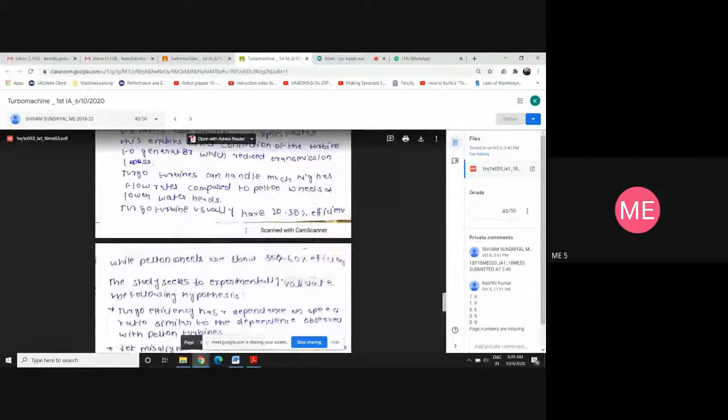Proper instructions are given from myself, HOD, as well as from the institution mail. In spite of that, if people are not following that, we have to take some rules, some action. So we are taking that. Okay, is it clear now?

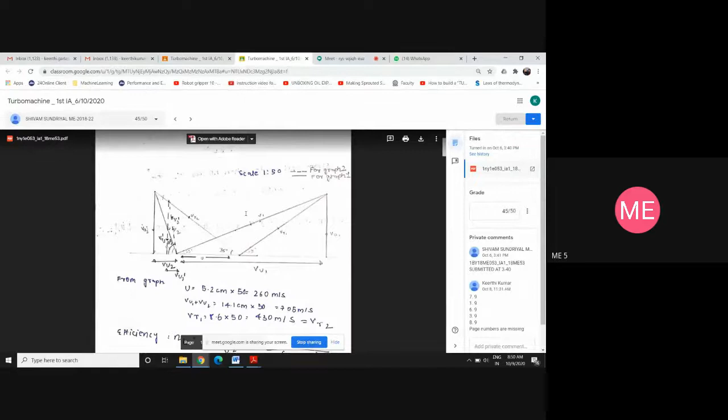Shivam? Yes, sir. Yes, sir. Okay. For others also, I am telling, I have written the comment here.

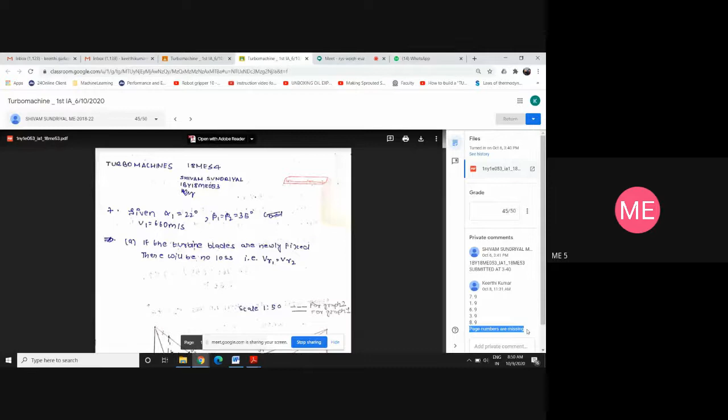Why have you got less marks? Either the page number is missing, signature missing, or question number missing. So in the next internals, I want you to be very careful regarding that. Should not miss those things. In exam, if I am the evaluator, generally if question numbers are not there, we will not have the patience to give full marks. So you should not lose marks just because of the question number, okay? I hope you understood what mistake you've done.

Okay, all of you go back to the earlier class, that is multi-stage turbine. Can anyone tell what is the other name for the multi-stage turbine? Curtis turbine. Multi-stage turbine, other name for the multi-stage turbine is a Curtis turbine, correct?

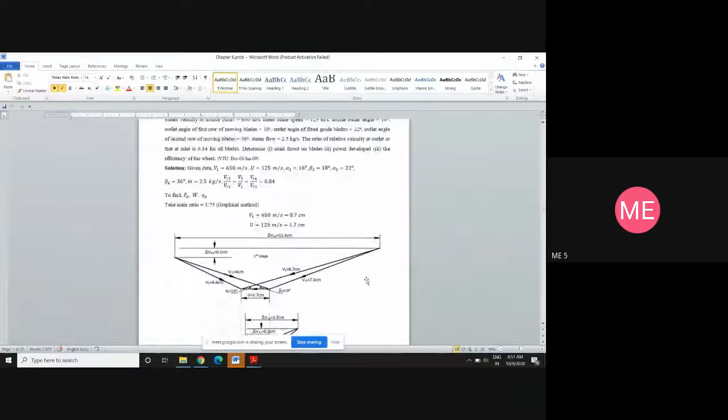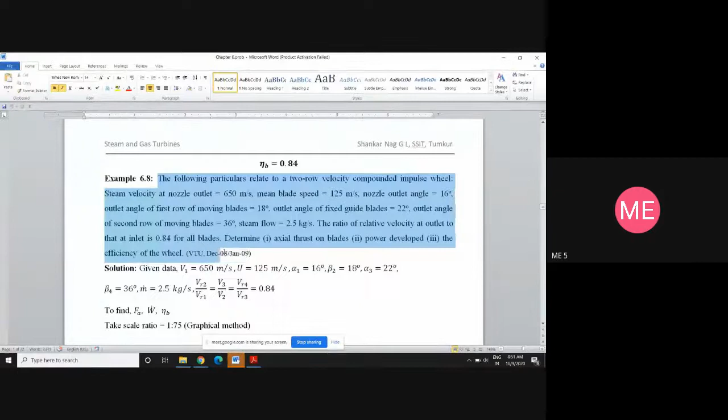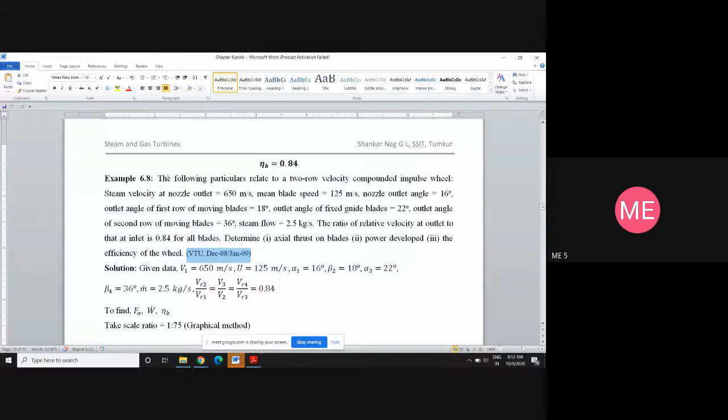Can you all see this screen? All of you copy this question. Please copy this question. This question was asked in Jan 8, then December 8, and Jan 9. Many times I prepared this soft copy, but it was asked that time. Okay, take this. The following particulars...

Relate to a two-row velocity compounded impulse turbine. What do you mean by this? It is a two-row velocity compounded impulse turbine. It is nothing but a multi-stage turbine.

The steam leaves the nozzle outlet. The steam velocity at nozzle outlet is 650 meters per second. Can you name what this is? The steam velocity at outlet of the nozzle is 650. That means V1, absolute velocity at the inlet. Even though here it is given as outlet, the outlet is with respect to the nozzle, but the 650 is with respect to the inlet if I consider for the rotor.

Then the mean blade speed is 125 meters per second. That is U, mean blade speed is U. Nozzle outlet velocity is V1. And nozzle outlet angle is 16 degrees.

That means alpha 1. Just to confuse you, he has given outlet. So many students, what will you do? Nozzle outlet means you will simply take alpha as outlet, meaning 2. No. Nozzle outlet will be the inlet for the turbine. That will be 16 degrees, alpha 1.

Then outlet angle of the first row of the moving blade is 18 degrees. Outlet angle of the fixed guide blade is 22 degrees. Outlet angle of second row moving blade is 36. Then steam flow rate is 2.5 kg per second.

All of you copy this question. I'll explain how to write down the data. Next, the ratio of relative velocity at outlet to that at inlet is 0.84 for all the blades. Determine the axial thrust on the blade, power developed, and efficiency of the wheel. All of you copy this question.

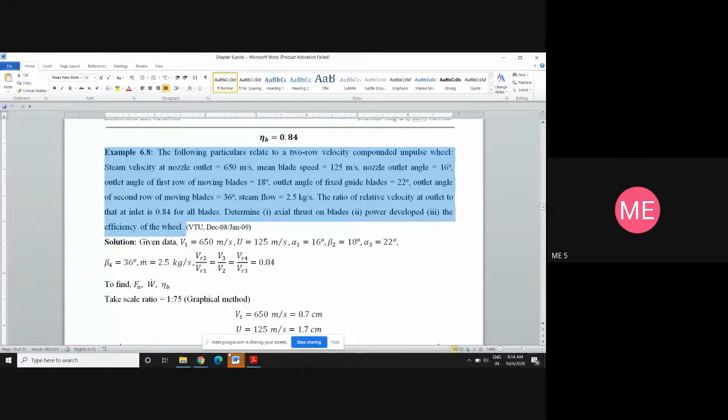I hope everyone has copied that question.

Yeah. Can you see the screen? Hello? Yes. Okay, okay. So I'll just open the question for my own reference.

I'll explain how to write down the data. What he has given: the following particulars relate to the two-row velocity compound. That means you understood that it is a multi-stage turbine. I'll write it either as Curtis turbine or multi-stage turbine. So this is the multi-stage turbine.

What data has he given? The steam velocity at nozzle outlet is 650 meters per second. That is V1 is 650 meters per second. There is no doubt in the single stage as well as this.

There is no change in single stage or the multi-stage. V1 is always the velocity of the steam which is inlet to the turbine, or the other name is V1 is the velocity of the steam which is coming out or exit from the nozzle. That is 650 meters per second.

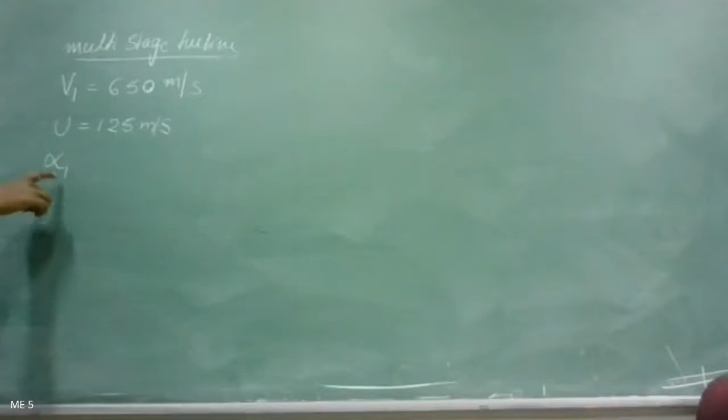Even though he has given outlet, we will write it as 1, because for the nozzle it is outlet, but coming for the rotor, this alpha 1 is inlet. So alpha 1 is 16 degrees.

Then the outlet angle of the first row of moving blade. That means beta is the moving blade angle. Outlet is 2. It will be equal to how much? 18 degrees. It is 18 degrees.

Then the outlet angle of the fixed guide blade. Guide blade angle is alpha. What is the outlet angle of that alpha? It will be alpha 3, and that is equal to 22 degrees.

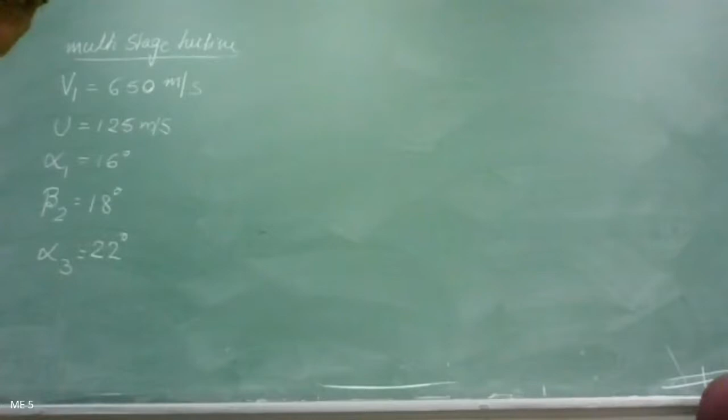Then the outlet angle of the second row moving blade, again moving blade is beta. If you go for the second row, it will be called beta 4. Beta 4 is equal to 36 degree. Then the mass flow rate is 2.5 kg per second, m dot.

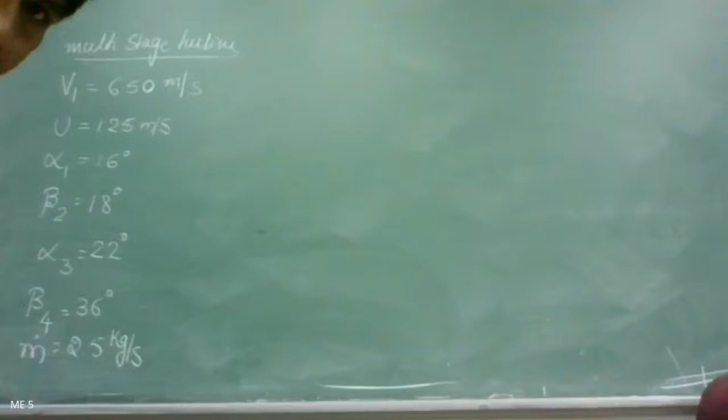2.5 kg per second. What he is asking is to find the ratio of relative velocity at outlet to inlet, which is 0.84. That means CB is equal to 0.84.

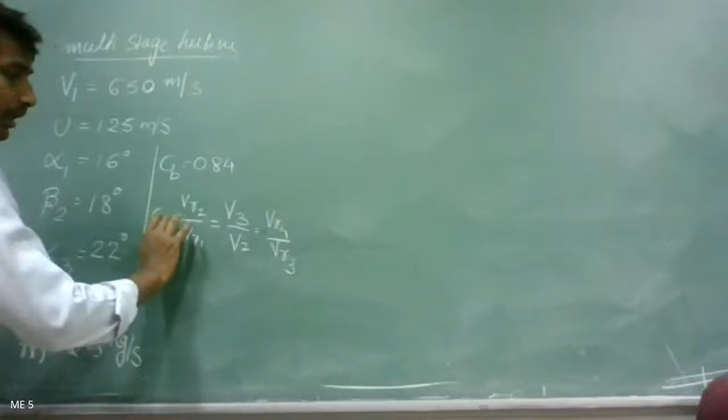How many blades will you get? We'll get 3 blades: first moving blade, second fixed blade, again second moving blade. So the CB value is same for all. That means VR2 by VR1 is equal to CB, and again the same value, 0.84, equals V3 by V2, which equals VR4 by VR3. He is telling this is the CB ratio for first moving blade, fixed blade, and second moving blade, and it is same. So I have taken it equal, and it is equal to 0.84.

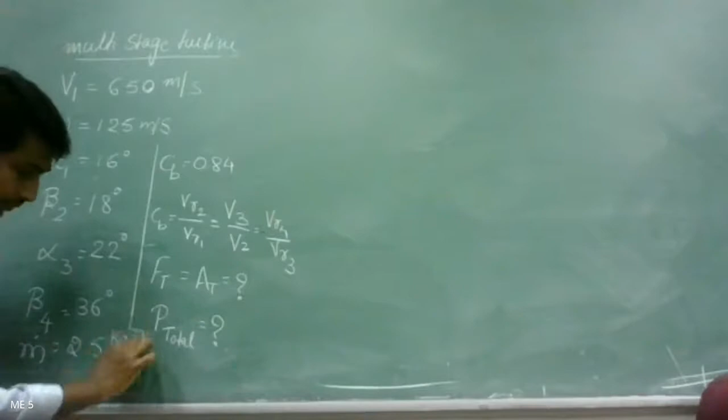He is asking you to find out axial thrust on the blades, so either you write FT or AT. Axial thrust is how much. Next, power developed, P total, because there is a multi-stage. So P total, then the efficiency of the wheel or blade, either you can call it blade or wheel.

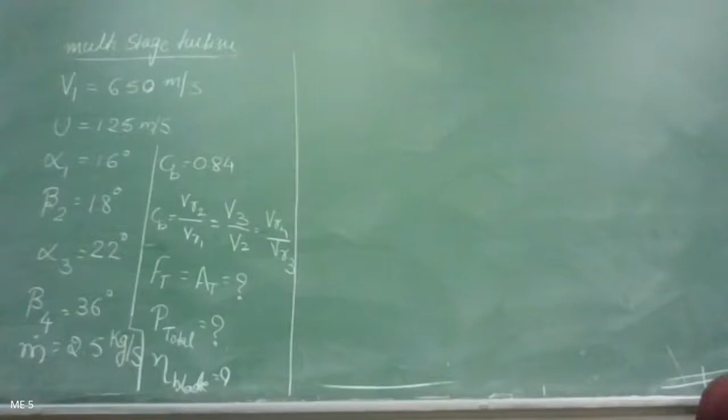So this is the data given. I've written the data. One minute, okay, write down the data. Any doubts in writing the data?

I hope you have completed. Then write down the scale ratio. So first stage you can proceed, same whatever method you followed in the De Laval one, same procedure, draw the velocity triangle for the first stage. To go for the first stage or the graphical method to draw the velocity triangle, we'll go for scale ratio. So how to take the scale ratio? What is the thumb rule to take the scale ratio?

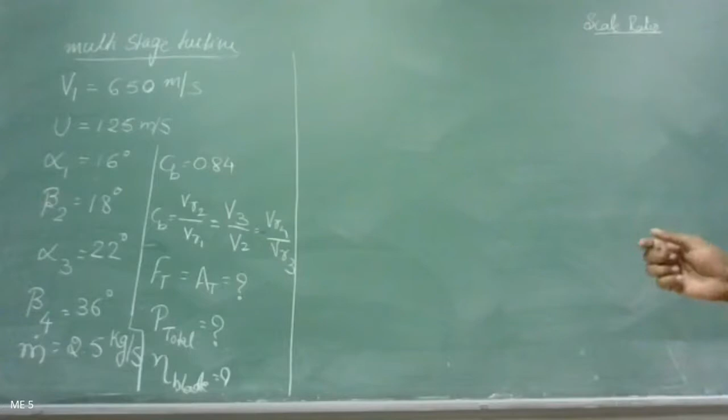V1, U should be equal to 4 centimeter. If you want U to be 4 centimeter or 3 centimeter, what's supposed to be the value of scale ratio? 1 centimeter is equal to, can you tell? So around 30, it's coming 31.25. So you have to take a better scale ratio. 31.25 doesn't look good.

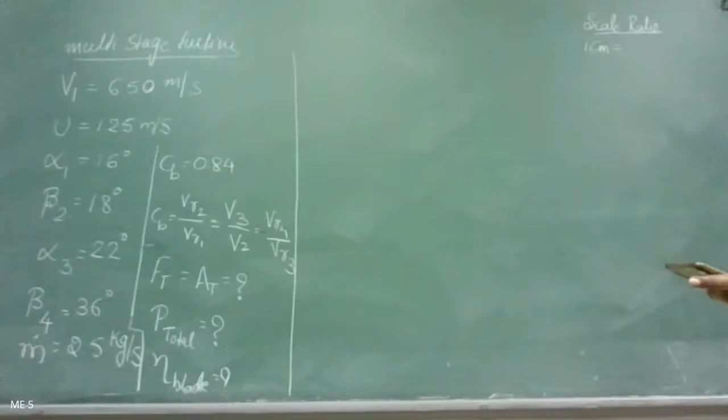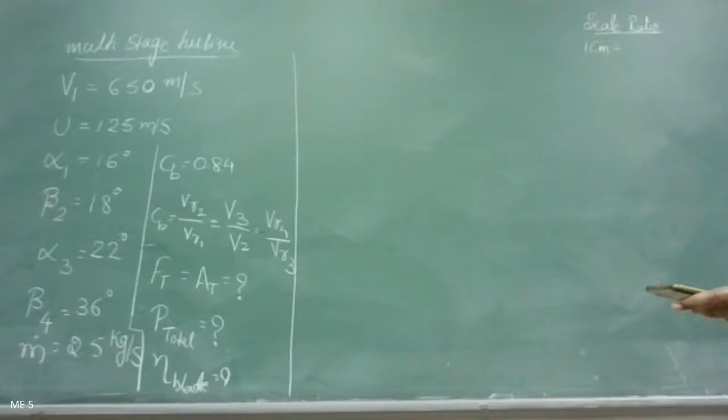Other values, other scale ratio, you can take any scale ratio, no issue. So okay, what about 31 point something you told now? That only I take, 31.25? Okay, I take that only, no issue. 31.25 meters per second, you can take any scale ratio, no problem. But make sure that U should be either 3 centimeter or 4 centimeter, don't exceed that 3 or 4 centimeter.

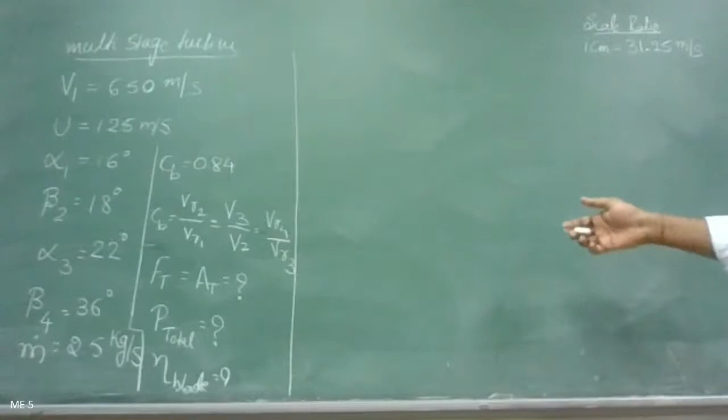Then for multi-stage triangle, to draw the velocity triangle for multi-stage turbine, what you do is take the book and draw the figures horizontal. Don't draw as you draw in the De Laval turbine because it cannot accommodate both the stages properly. So if you draw horizontally, it can accommodate the figures properly.

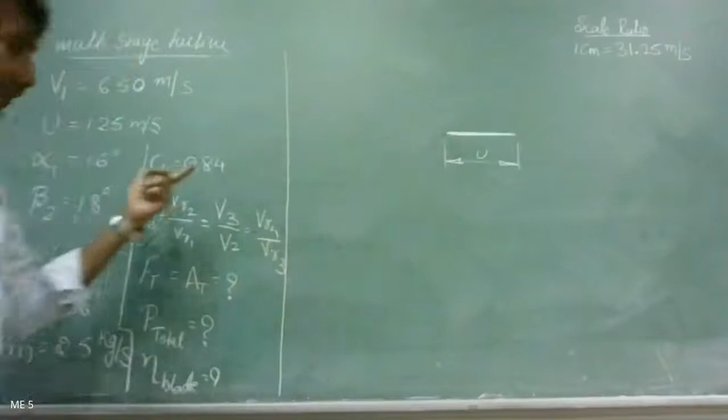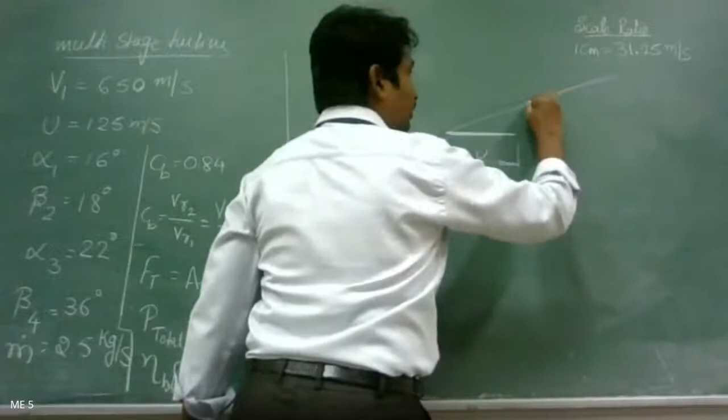So what I do is draw a 4 centimeter line. As per the scale ratio, this is equal to 4 centimeter and this is equal to U. U is finished. From the left hand side end of U, you start drawing alpha 1. Alpha 1 is 16 degree. So from here, draw alpha 1 at an angle of 16 degree. So what should be this length? That length should be equal to V1. So V1 is 650, can I tell what should be the length of V1 as per the scale ratio?

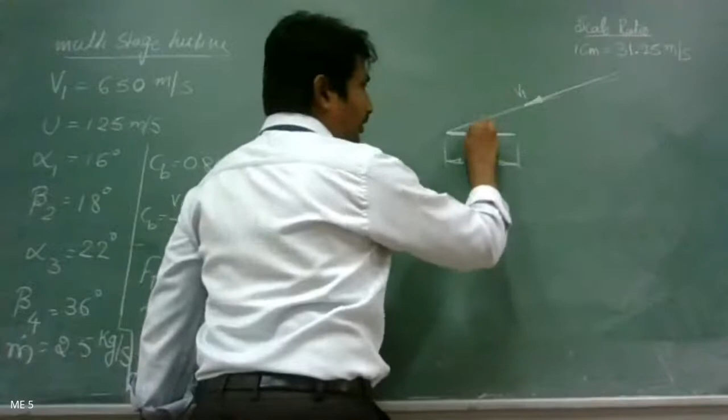Anyone? If I take scale ratio as 31.25, what should be the length of V1 as per the scale ratio, and this is alpha 1? 20.8. See, 20 centimeter, can you draw here? I think probably it is impossible to fit in a single sheet. 20 centimeter, it is impossible to fit.

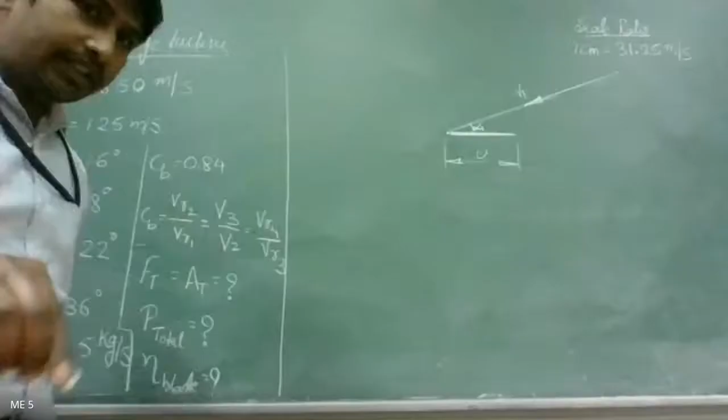Correct? Yes. So in this case, what you do is instead of taking U as 4 centimeter, you take it as 3 centimeter. You take it in such a way that the length of U should be equal to 3 centimeter. Like that you write a scale ratio. Understood how to write a scale ratio? For a single stage, if you take scale ratio U equal to 4 centimeter, you can accommodate properly. But here, if the length of U is 4 centimeter, I cannot accommodate V1. So in that case, you take the value of U equal to 3 centimeter. So how much will be the scale ratio?

41.6. 14.66. 1 point. 41.66, sir. Oh, I'll take that.

41.66. So if I take scale ratio 1 centimeter is equal to 41.66, then the U length will be 3 centimeter. What will be the length of V1 in that case? Check out. Can you accommodate that?

What will be the length of V1? 15.6. 15.6. Yeah. Can you accommodate that 15? So that is also difficult. That is also not possible.

Then you take this as just 2.5. You take this U should be 2.5. Then you tell me what is the scale ratio. 50, sir. 50, yeah, 50.

If it is 50, can you accommodate V1? Yes, sir. It will be 13. We can do it, sir. It will come 13, sir, for V1. Then I think probably you can easily accommodate.

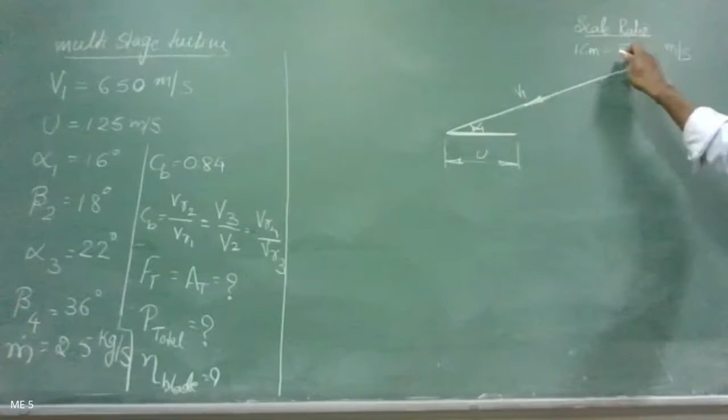See, understood how I found out the scale ratio? Instead of taking directly 50, I would have taken 50 directly because I know how much to take and how it is accommodated. I have taken trial and error method to make you understand better.

If I take 4 centimeter, I cannot accommodate V. If I take 3 centimeter, then also I cannot accommodate. If I take 2.5, I can easily accommodate.

So in this problem, I have taken the scale ratio equal to 1 centimeter is equal to 50 meters per second. If I take that, U will be equal to 2.5 centimeter. Now U is 2.5. Alpha 1 is as it is.

You draw V1 properly. You take the value of V1 properly. Anybody having doubt in the scale ratio? I hope it is clear.

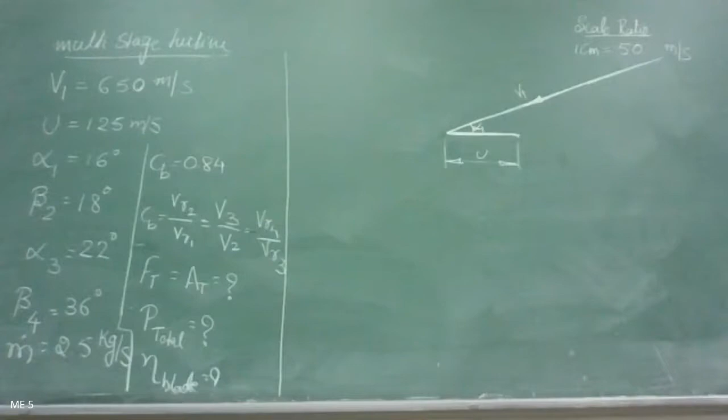Now what I will do, to complete this velocity triangle, what we did in De Laval, same thing here also we will do, because this first stage being drawn is nothing but a De Laval. If I go for the multi-stage, then it will become Curtis.

So to complete this triangle, from this end of the line, I will draw a vertical line. What is the name of this vertical line? This is VA1. I brought the vertical line.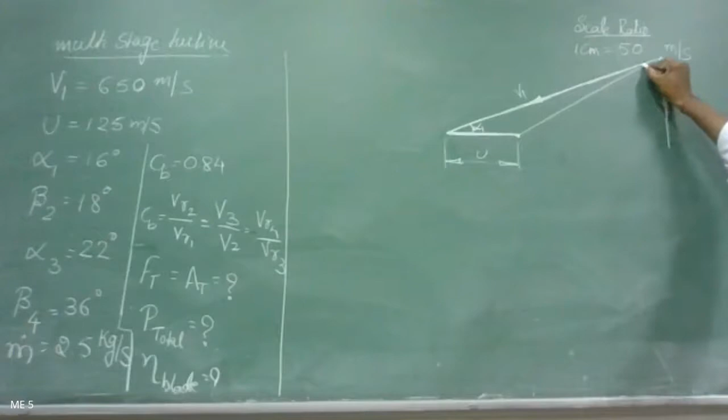Then from this end, I will join one line where it connects to this point. Simply join the line. It has to connect to this point and extend the value of U further. Close this.

So this line is called VR1, relative velocity, and this angle is called beta1. Again, from the distance from here, if I measure, this will be equal to whirl velocity at the inlet, VU1. VU is called whirl velocity.

Anybody having doubt in this? How to draw the velocity triangle? Anybody having doubt? No, sir.

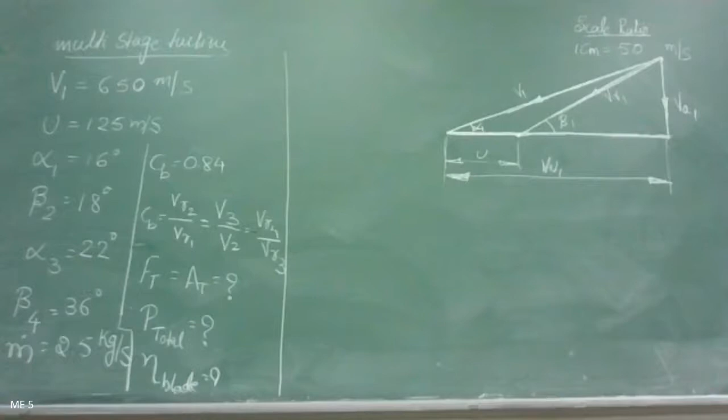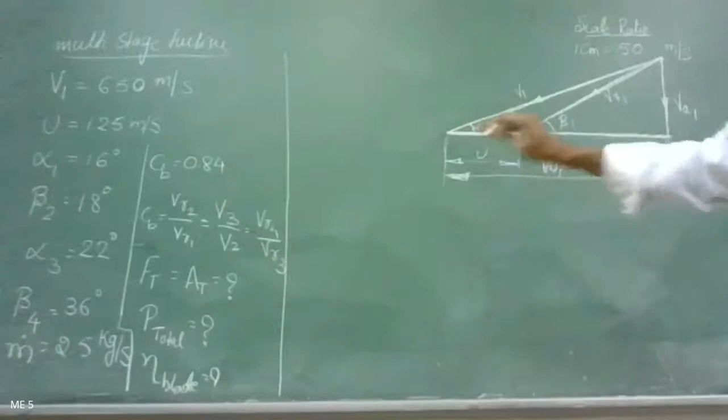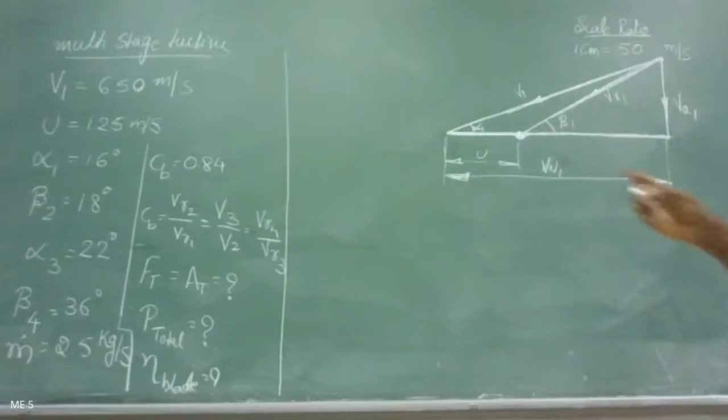Always I'm supposed to start from this point. If I go for the outlet, I'm supposed to start from this point, and I'm supposed to know beta2 and VR2. So what is beta2 in the question? In the data it's given. Beta2 is 18 degree.

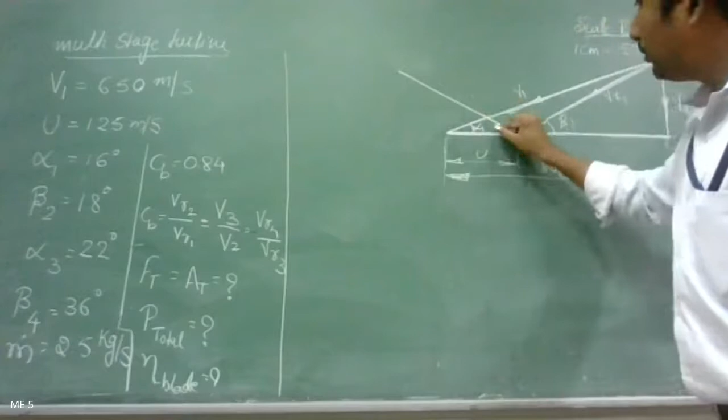You try to draw VR2 at an angle of 18 degrees. I will draw a line at 18 degrees, and this line's angle is beta 2. The name of this line is supposed to be VR2.

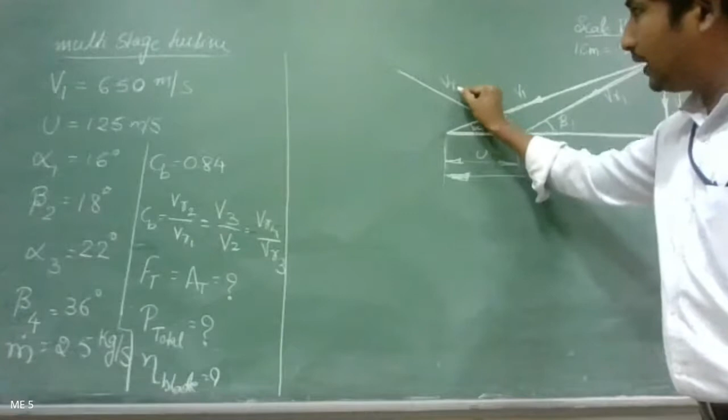How to get VR2? To get VR2, I'll make use of CB. CB is equal to VR2 by VR1. So what is the CB value? CB value is 0.84. Try to take out VR1 from this. VR1 will be how many meters per second.

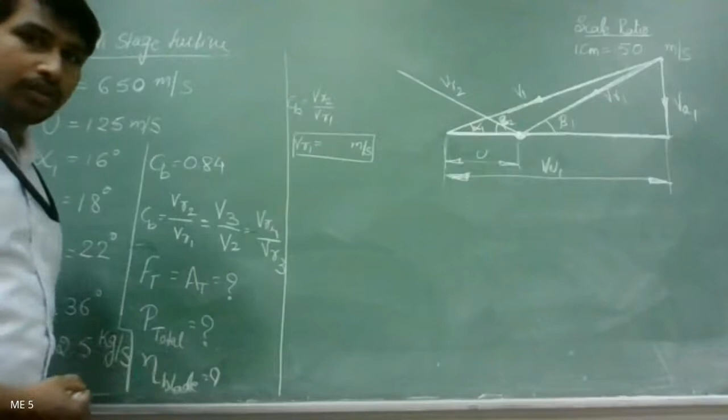You can put a table. As you're all aware how to put a table, you can put a table, or shall I show the table how to put? You try to put the table. I'll explain. I hope we can put the table, no? You try to put the tables.

First, here you will get 4 tables. One is inlet and outlet for the first stage, again inlet and outlet for second stage - 4 tables you will get. But in D level, you will get only 2 for inlet and outlet because it's only 1 stage. Here you will get 4 tables. First 2 tables tell about inlet, outlet with respect to the first stage, and inlet and outlet with respect to the second stage. That table is not mandatory - without the table also, you can find out all the values. But if you put the table, it will be easy for you for further steps.

So VR1, how much did you get? Anyone can tell the answer, or shall I tell the answer? You got 55? I got 535, sir. Just a minute, I'll check. 535, okay. Others? Yes sir, same. Okay.

535 meters per second. So convert this to scale ratio, you try to draw VR2. Once this is done, you think that the outlet velocity triangle is simple.

So how to draw? Just drop a vertical line. Vertical line is dropped, and the name for this vertical line, whatever you have dropped here, is VA2. Finish this by extending the U, and from here you join the line from one end of U to the apex of the triangle. So the name of this line is V2, and this angle is called alpha 2. And the distance from here to here is U - whirl velocity at exit, VU2.

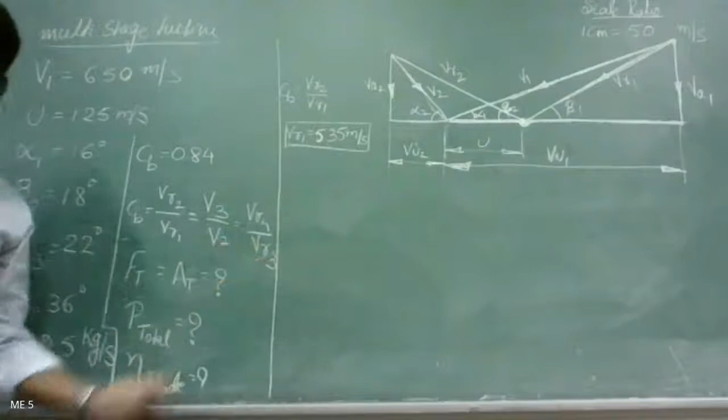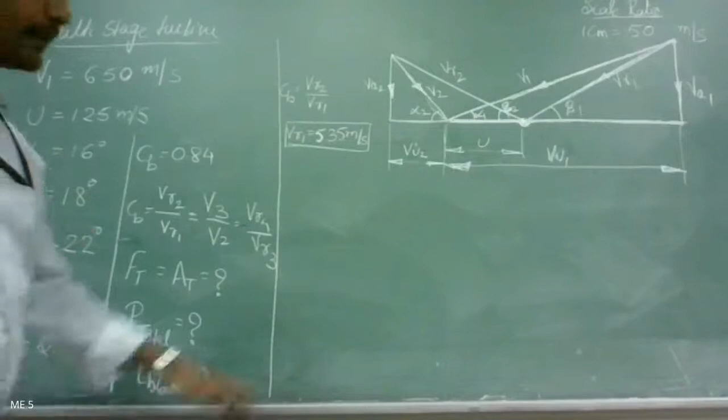Can you do this? One more hint I'll give you to identify whether your solution is correct or wrong: always for turbines, the inlet should be bigger and outlet should be small. Check here - VA1 is bigger and VA2 is smaller. That means you can see in the figure directly that the inlet portion is bigger and this is smaller.

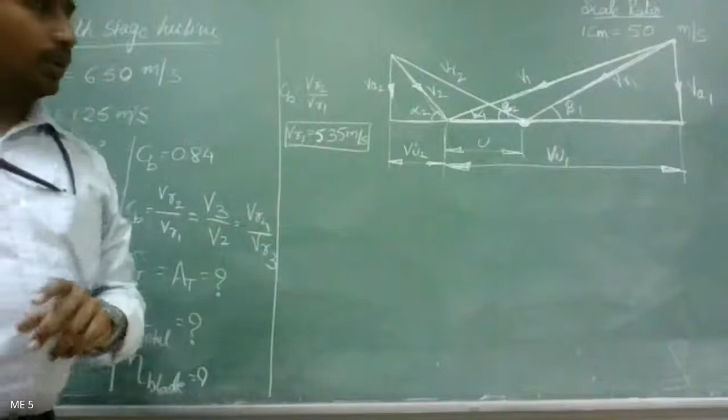If that is correct, then the solution will be correct. I think in internal, somebody has done a mistake. For this, what he has done is - inside means the inlet stage is smaller, he has drawn, and the outlet he has drawn bigger. So you should know that somewhere you are doing a mistake. Where you will do the mistake is in this case.

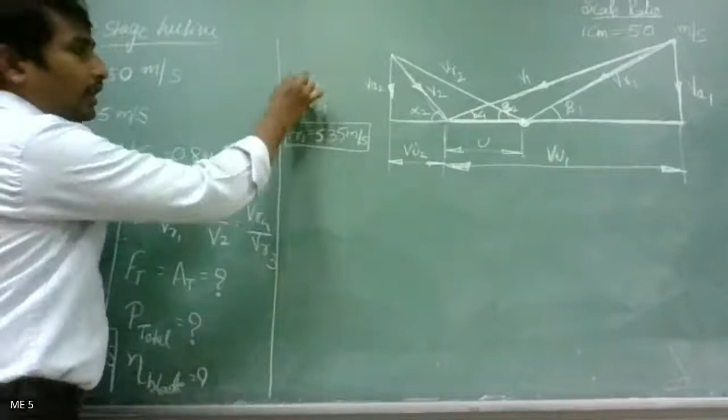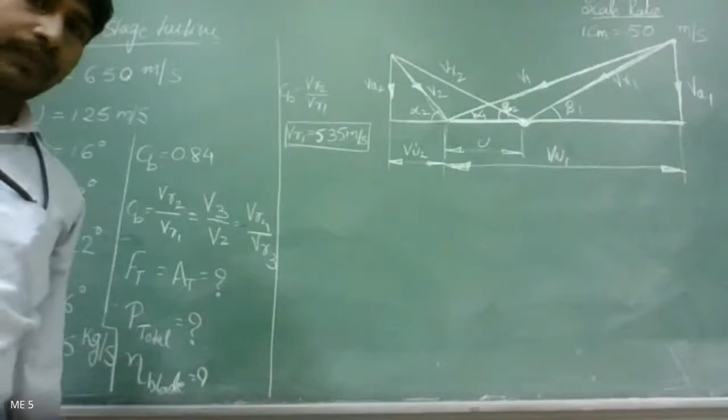By taking the ratio, if we take VR1 by VR2, then definitely outlet will become bigger. It is not correct - outlet should always be lesser as compared to the inlet triangle. So that is one more thumb rule to check whether you've done it correct or not. If I see the triangle and identify this is bigger than the inlet, then the entire solution will be zero - marked as wrong. So be careful - the outlet triangle should always be smaller as compared to the inlet triangle.

I hope you can draw the table. You can put a table. I hope you can put the table.

Then I'll proceed further. To proceed further, what I will do is extend the U with a thin line. Why am I extending this U? Because U for the first stage and the second stage is same. So I have dropped the vertical line from both ends of U. Now I am going for the second stage - this is the first stage, inlet, first stage outlet. Now I am going for second stage inlet. To go for the second stage inlet, first let me draw the U value. So this is U - here also arrow mark.

So again this is equal to U. No need to write U here, same thing I dropped here. But you should know, as a first problem, I'm writing U here as well as here. The value of U here also is same.

So how to start in this? Assume that this is the first stage for you. Can you tell where I started, whether I started from this point or this point, from the left hand or the right hand side? I started from here, correct?

Usually I used to draw the line. What is the angle I suppose to take here? If it is the first stage, I suppose to draw the line at an angle of alpha 1. But now it is the second stage, I suppose to draw the line from here at an angle of alpha 2, alpha 3. What is alpha 3?

Check out here, whether he has given alpha 3. Yes, alpha 3 is given as 22 degree. So again we'll start from here at an angle of 22 degree. I'll draw the line. You draw this line as alpha 3 at an angle of 22 degree.

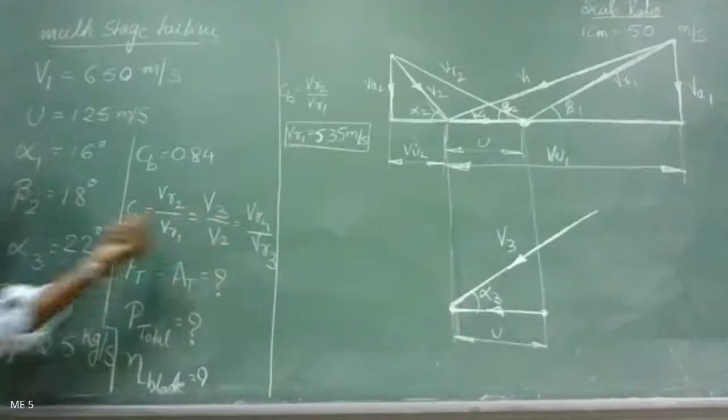Again V3 we will find out for this CB. CB is equal to V3 by V2 for multi-stage. This is for fixed blade, no? V3 by V2, that in the formula sheet also I have given. So CB is equal to V3 by V2. So you can easily find out what is V3 value in terms of meters per second.

You find out what is V3 value, that also you can find out. Can anyone tell the value? What is V3? I'll explain the procedure. 275, sir. Okay, I'll write the values what you got. I don't know, others you check out.

275 meters per second. As per the scale ratio you calculate what will be V3 in that case. If it is 275, 5.5. You draw a 5.5 centimeter line. I think probably it will end up here, for example. If it is ending here, if you know these three, U, alpha and V, I can complete the triangle.

How to complete? Drop a vertical line, name this as VA3, extend this U, join the line from this apex to the one end of the U. So this is called as VR3 and this will be equal to beta 3. So the length from here to here will be equal to VU3, whirl velocity at the inlet of second stage.

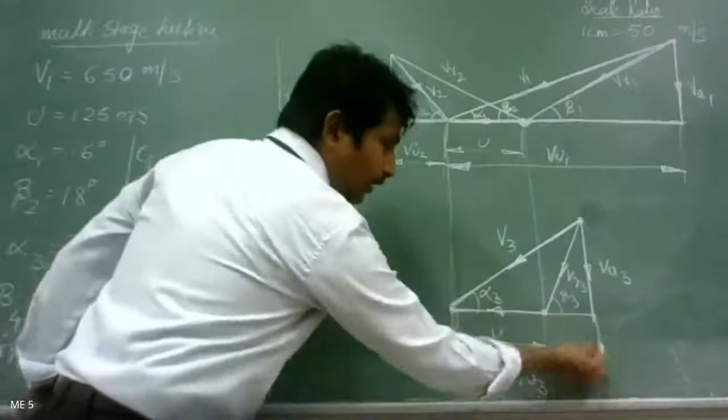Whirl velocity at the inlet of the second stage. See, for second stage, inlet is 3 and outlet is 4. So you have completed that. Then to go for the outlet, to go for the second stage outlet, what do I need? I need beta 4. I suppose to start usually from here, from this point. That is beta 4. What is beta 4?

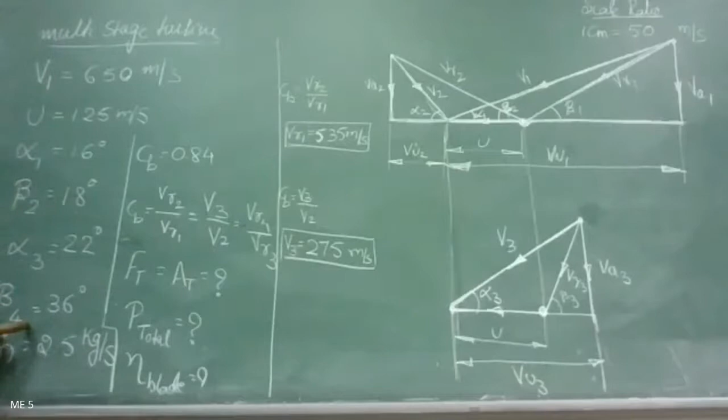We'll go for the problem. Beta 4 is clearly given. Beta 4 is equal to 36 degree. Beta 4 is 36 degree. So I will draw a 36 degree line. I will draw one line at an angle of 36, that is equal to beta 4. You draw the line at an angle of 36 degree beta 4.

Next question is what should be the length of this? What has to come on that line? I know, on this line, VR4 has to come. What is VR4? How to find out VR4? VR4 can be found out again from CB. CB is equal to VR4 by VR3. You know VR3, CB is given, that is 0.84.

You find out VR4 in meters per second. VR4 you find out, so you will get a value. Convert that to scale ratio, you draw the line. So this line will end up somewhere here. I know where it will end. It will end up here. It is not exceeding further.

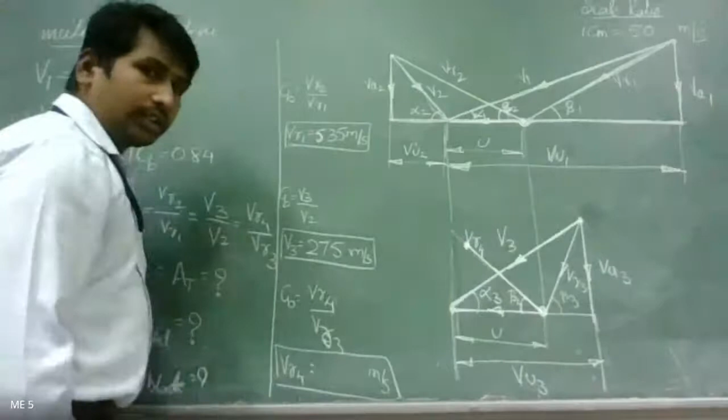If it is ending here, how to draw the velocity triangle? Simply drop a vertical line. All of you observe here, later on you can solve. Observe here how to solve this, later on you can solve the further step. You draw the line equal to the VR4. From here you drop a vertical line, and the name of this vertical line will always be equal to

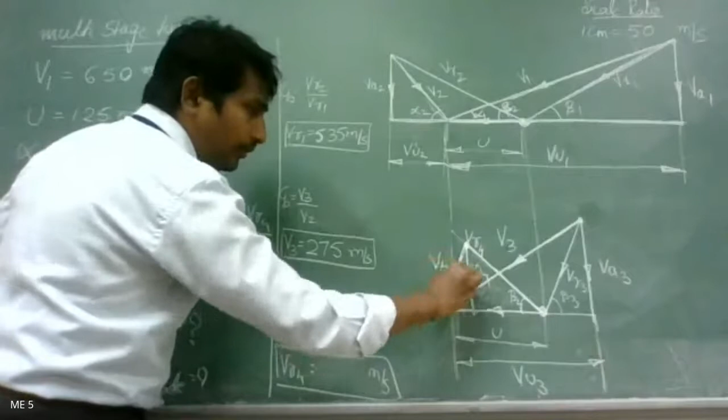VA4. Either this VR4 can come here, from here also you can drop a vertical line. If it is here, you drop a vertical line. Wherever the VR4 ended, you drop a vertical line, and the name of that line is VA4. Done. Join from this line to this point, to this end, to this end. So this will be equal to V4, and alpha 4 will be this one. Alpha 4 is greater than 90 degree now, alpha 4 is bigger than 90 degree, it's higher than the 90 degree value.

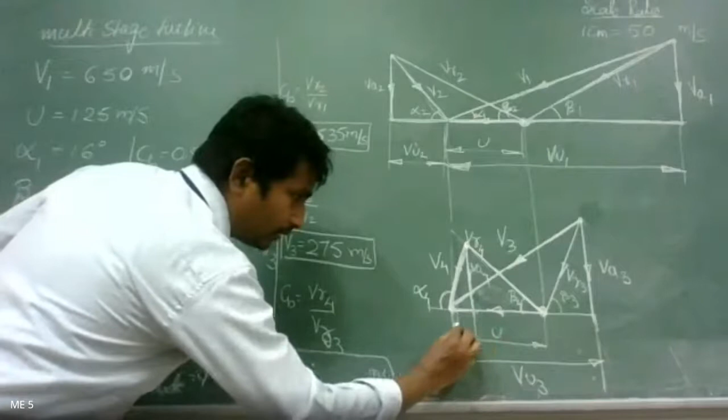So what is VU4 in this case? In this case, VU4 will be this two distance. That is VU4, because the velocity triangle of the exit went inside. So that is why it is called VU4 inside.

Okay. Then if I ask you to find out work done, efficiency, power, whatever, you're supposed to write like this: VU1 plus VU2 for the first stage, plus VU3 minus VU4 for the second stage.

Or you can write like this, plus and minus — this will be simple for you. Why did I include a minus symbol here inside the bracket? Because VU4 went inside. So wherever we substitute this in the formula, VU1 plus VU2 plus VU3 plus VU4, you substitute plus if the velocity triangle went outside. If it is inside, I'll retain the plus as it is, but put a negative symbol inside the bracket.

This negative symbol indicates, without even seeing the velocity triangle, I can understand it. Because of the negative symbol, this outlet velocity triangle came inside, and alpha 4 is greater than 90 degrees because of this negative symbol. Clear?

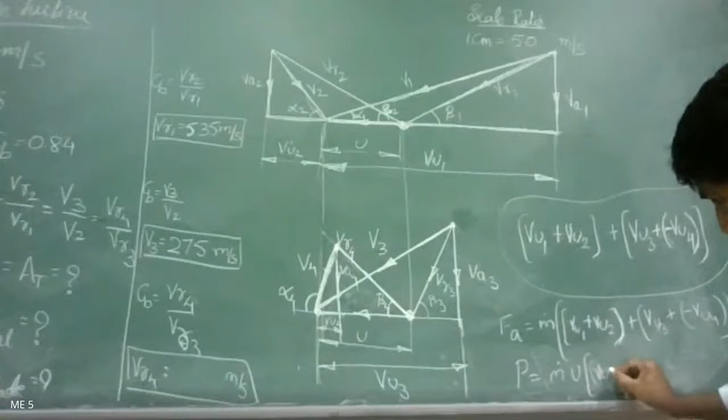Then power developed, P is equal to m dot U into VU1 plus VU2 plus VU3 plus or minus VU4. This is the formula for power development in watts. If we divide by 1000, we'll get it in kilowatts. That you already know. Then efficiency.

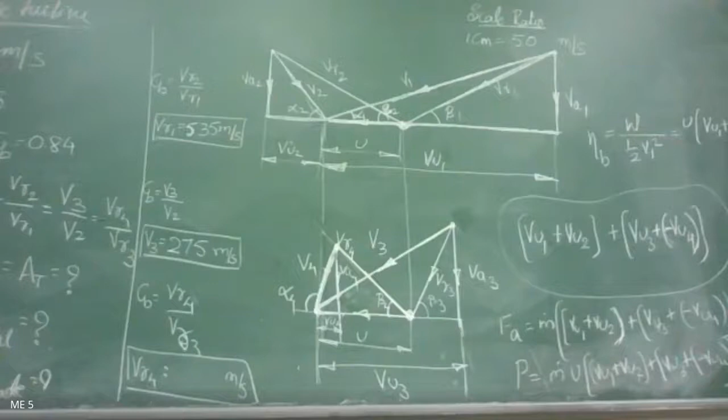Blade efficiency is equal to work done, or power developed, divided by half into V1 square. What is work done? Work done will be equal to U into VU1 plus VU2 plus VU3 plus VU4 — that is the formula for work done. That formula sheet has already been shared with you. You can have a look at the formulas. Efficiency, work done, everything I already shared.

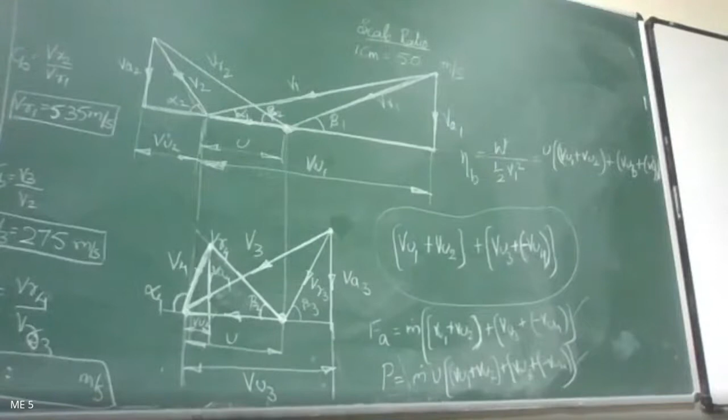So in today's quiz, I'll ask you to find out the value of FA, P, blade efficiency, and work done separately, and then also the velocity triangle. Anybody having doubts in any of the problems, in any of the stages?

All the formulas are already given. Just you need to be careful about VU4. VU4 will be negative in this problem. In the same problem, if this VR4 went outside, then VU4 will be positive.

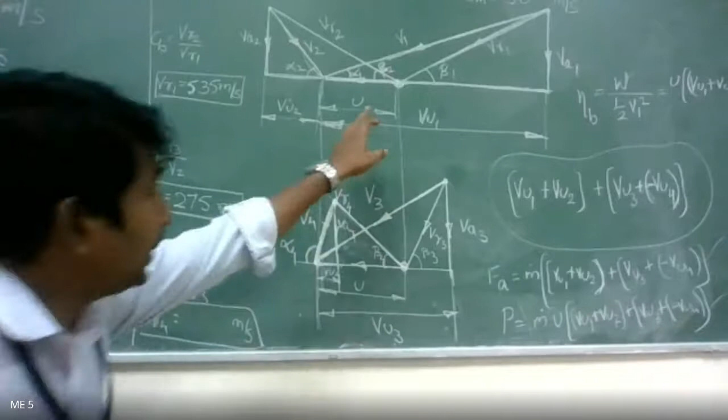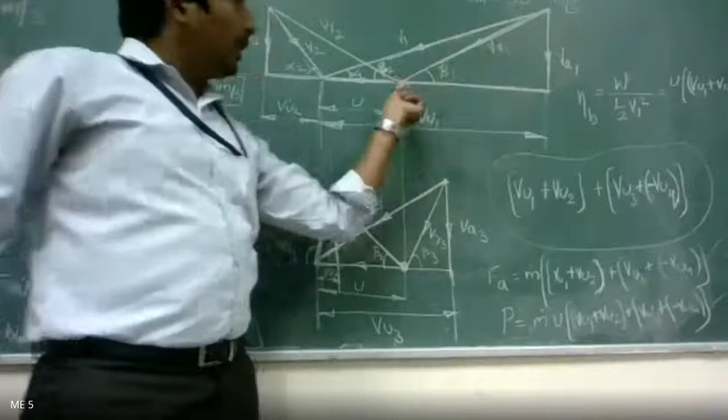Okay, I'll explain that. See, this VR1, no need to find out. We know U, we know alpha 1, we know V1. If you know those three, just drop a vertical line and extend this U, I'll get VA. Done — connect one end of the U and the apex of this. Connect those two, whatever length you get, that is VR1.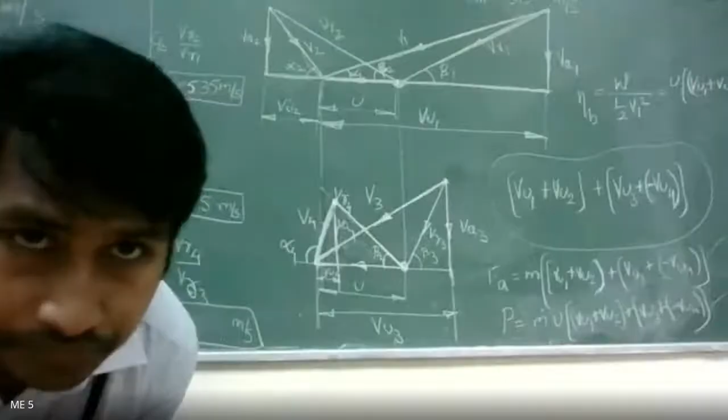Okay, sir. So over here you have found out the value of VR1, that is 535 meters per second. So here you're putting the value of CB and VR2 and finding VR1? Yes, yes. No sir, VR1 we got from this figure. Then sir, did we find out the value of VR2? For getting VR2, I substituted this formula. Okay, so then we found out the value of VR2, not VR1?

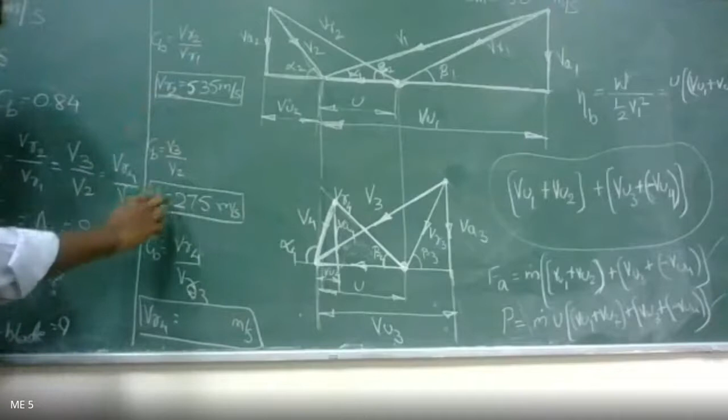Oh sorry, here I've written 2, no? Yes sir, yes, correct, correct. Sorry, this is VR2. Because VR1 we got from the figure, VR2 we'll find here, V3 and VR4. Good observation. Any others having doubts?